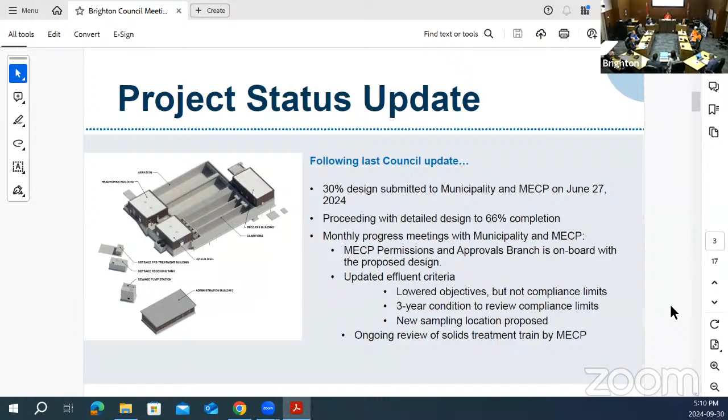So this slide shows you the overall site rendering. Again, this is as updated as last week. I'm going to kind of walk you through the different functions of the site so you're a bit more familiar with the different areas that we'll be talking about.

At the bottom left of the page, you'll see there's an administration building that's immediately north of the current facultative lagoon. And then in that same area, you see there is a septage pre-treatment building as well as septage receiving tanks. And then in between the building and the tanks is the sewage pumping station. So that's where all the sewage is going to get pumped from the Harbor Street pumping station as well as the gravity sewer.

So all the sewage will then get pumped into the headworks building, which is on the north side of the site there. In that building, there will be a screening process as well as grit channels on the outside of that building. Following that, the flow will go into the aeration tanks, followed by the clarifiers, which are the empty tanks that you see in the middle. Then the flow will proceed into the UV disinfection process, and from that point on, it will connect to the plant outfall that discharges into the wetland.

To the east of the clarifiers, you'll see there's a process building. That's where all the major equipment, for example, the blowers, the sludge pumps, and all the chemical systems will be housed.

Next slide, if you can. So the next thing we want to, can I go?

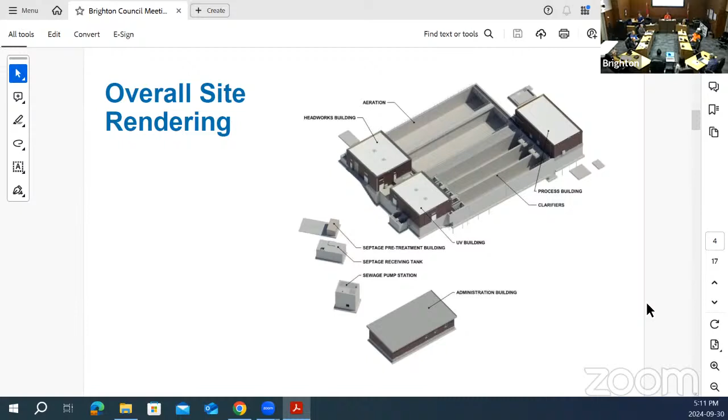So the next aspect that we wanted to review is the opinion of probable cost. As we move through this process, we wanted to bring council up to speed on where things have gone. Originally under the design concept from December of 2023, we were sitting at about 28.8 million. As you can see from the slide, having completed the 30% design and gone into more detail, costs have increased to 36.8. We wanted to give council an update on some of those main drivers that we're seeing in the industry and that are occurring through this project.

So I'm going to review these four main ones. We also have some slides that talk about the individual pieces, but the main drivers here, the big one being inflation and increased costs of equipment supply. We're seeing quite a large increase in a lot of equipment, upwards of 40 to 50% over the last eight months or so. I can't say to the driver necessarily of that. It's more of an economic thing.

The allocation of space for future expansion. Originally when we had done the concept, we were looking at just the design for the current treated capacity. We've now tried to make sure that we build in space for larger areas, and we're going to go through some of the future proofing that we've designed into the plant right now.

Some of the refinements of the scopes, for example, in consultation with Hydro, in order to provide enough power for the site, we have to buy a large transformer, whereas before we were under the assumption that Hydro would provide that. As you work through the design, these types of things happen. Also some of the indoor and outdoor installations, preferences and operational aspects as we work through with staff, as well as the administration functions. We've tried to refine that down, working with staff to dictate what areas and spaces they need.

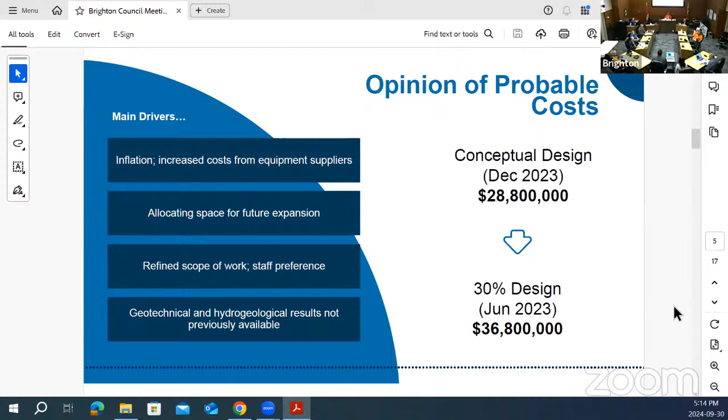If you want to go to the next slide, please. We've also broken this down by the individual component of the plant and tried to provide a cost comparison of where the costs have changed, and some drivers to the municipality of where things have gone and why. A lot of these I've already reviewed, but the influent pumping station has increased. A lot of these costs have increased.

For septage, originally we just had a tank. We have more pre-screening in there, things like that. Headworks, again, a bit of future proofing, as well as costs. For instance, the screens, since October, November, December, when we were looking at costing, have almost doubled in cost.

It's just one of those things that we continuously try and get updates on, but it's hard to put your finger on it a little bit sometimes. So I'm kind of working through these different ones. A lot of them, equipment costs have gone up. Future proofing, we're adding different pieces to try and facilitate an expansion in the future.

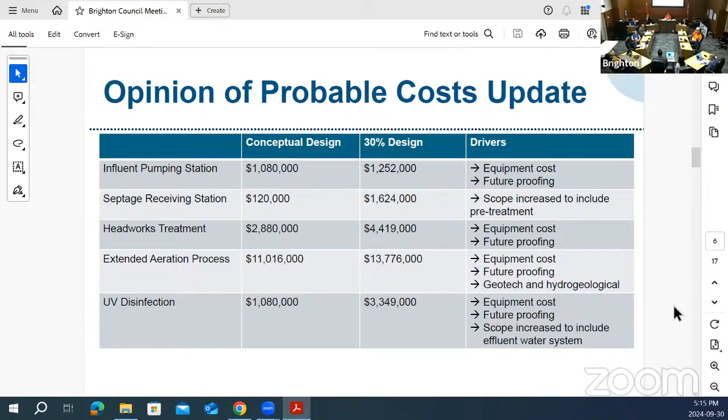Next slide, please. And again, kind of working through some of the different pieces. So the WAS stabilization and flow equalization, administration building, and then the electrical servicing and Arena Creek. So like we said, kind of coming in here and trying to show the difference between the 28.8 that we originally had and the 36.8.

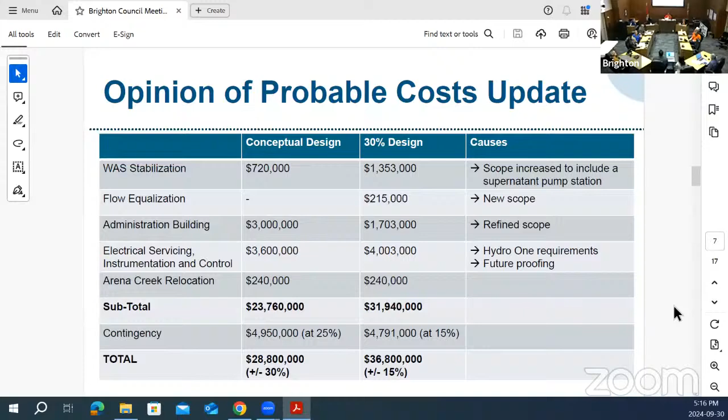Next slide, please. So the other aspect that we wanted to talk to council about, and understanding that budgets are hard things to balance, is trying to develop a plan here that we can provide the municipality with enough flexibility to try and mitigate these cost increases as they continue. So we're going to be putting in, and we're working towards this, 4 main provisional items that have significant cost implications. So each one of these is detailed here.

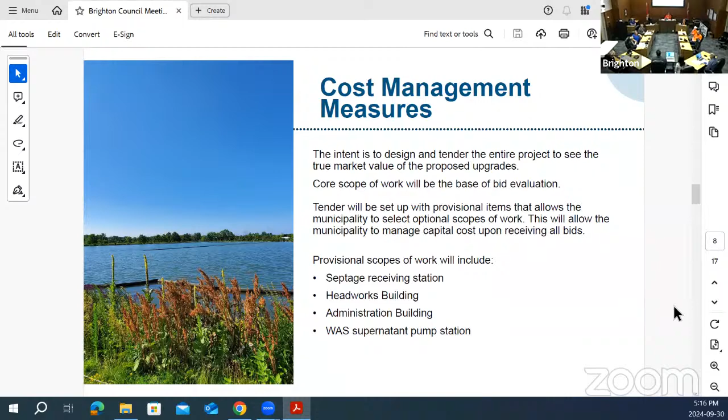And maybe if you want to go to the next slide. The way we've kind of divided this up is twofold. One is the core scope, which is basically the treatment plant and what we need in order to be able to provide treatment for sewage. The other ones are provisional items that aren't necessarily required. They do add value to what operations staff may do, or septage receiving, or other aspects, but could be cut out in order to facilitate a budget constraint.

So the core scope here, as you can see, is currently sitting at 28.9 million. And then the provisional items, so septage receiving at 1.7, the headworks at 4.5 million, the administration building at 1.8 million, and then the WAS supernatant pumping station could all be pulled out, at a cost of just under $1 million. So all totaling about 8.8 million in provisional items.

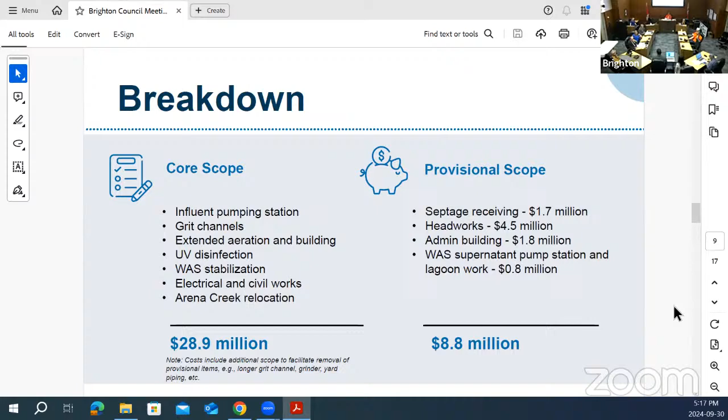So the intent is to put those to the industry, have them price that out, and then we'll have them put in costs for these, and then we'll be able to bring it back to council and make a decision at that point of what the budget and what scopes of work we want to proceed with. So Susan's going to talk a little bit about future proofing here.

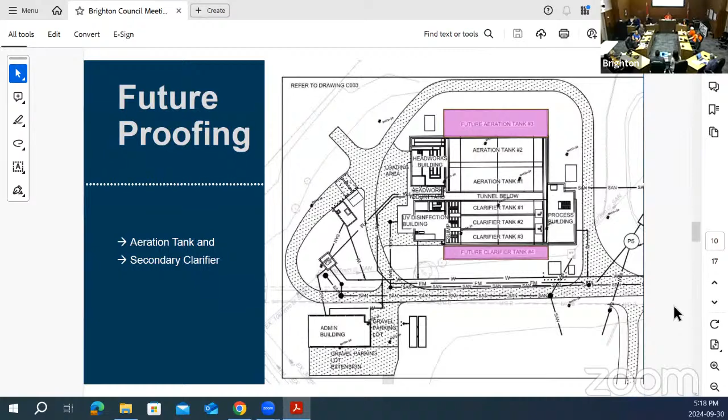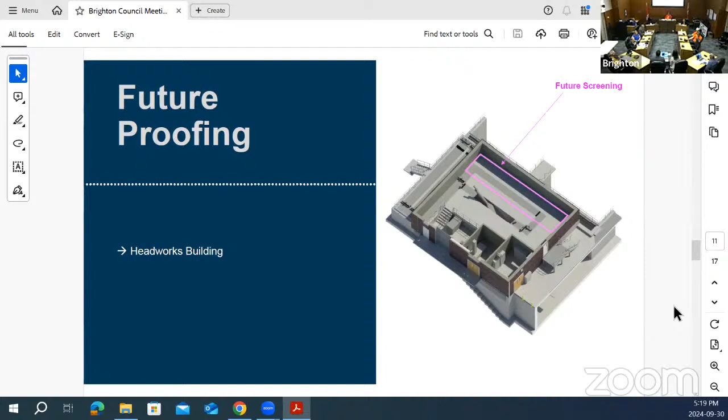And this is a rendering of the headworks building. So what we have decided to do here is to build a spare channel, which is where the shape is currently over. That's the spare channel for the future screening. So currently we have one screen that's sitting in the middle of that room there. That's an inclined auger screen. So that's going to be the active screen for this expansion. And then for the next planned expansion, the plan is to put an additional screen in that spare channel to get to the 6,000 cubic meters per day flow capacity. Next slide, please.

So this is the main process building where a lot of the major equipment is being housed. So the middle section is where the blowers will be sitting. And you can see there are 2 blowers sitting side by side in the middle of that room. So those are for the current capacity. And then there is a pad where the future blower is pointed at. That's the pad for the future blower to be able to supply the air for that additional aeration tank.

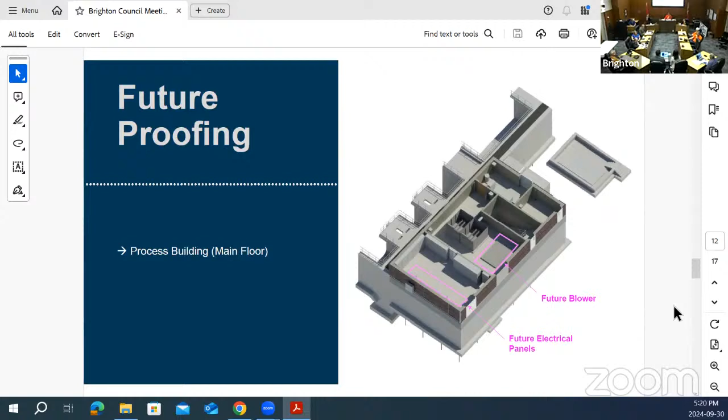And also there is an electrical room in the bottom corner of this page here. So that's the main electrical room that's going to house all the panels that power the rest of the plant, as well as the major equipment that's in this building. Again, there's wall space available so we're going to be able to accommodate any future loads to the plant.

So this is the basement of the process building where the sludge pumps will be housed. And then currently there are 4 sludge pumps sitting in that corner, and we have space allocated for a 5th future sludge pump.

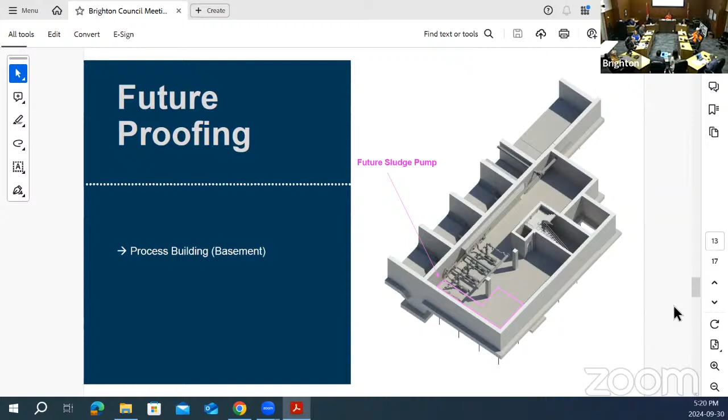So this is the UV disinfection building. Similar to the Headworks building, we have 1 active channel for the UV disinfection equipment. So those are the banks that sit in the channel, submerged, and we have allocated space for a spare channel on the bottom side of that room for future additions, as well as a future effluent weir. That's a hydraulic device that controls the level within the UV channels as well as the flow measurements. So that's all accounted for in terms of that backup channel for the future.

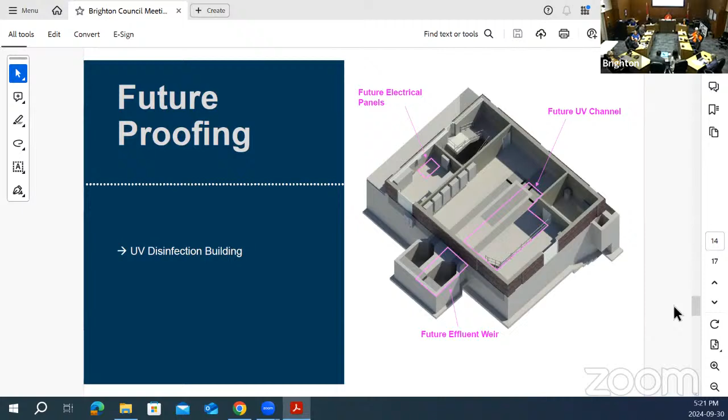Okay, so in terms of the schedule updates, we submitted the 30% design back in June, and we're well underway for the 60% design submission by end of October. We will be submitting the building permit application by end of this year, with the ECA, that's the Environmental Compliance Approval application, with the ministry in January 2025. Then we'll proceed with submitting 100% design by February, and be in a position to tender this project in February and close the tender by end of March. Construction start will be in the spring of next year. And that's the end of the presentation.

Thank you both. Before I go on to questions of clarification, because Councillor Butwell wasn't here when the CAO made her remarks, I'll note that this is just a presentation for information. Staff will be bringing a report on the 15th of October with a recommendation or recommendations for us to consider. Just an FYI for you. Councillor Wielden.

Thank you, Mayor, and through you. Love all of the future proofing. My whole approach is what can we build today that we don't have to build tomorrow? So I love that. Based just on my layperson's look at the number of tanks in this scenario, it looks like we're going to be able to add 1 more on either side. At what point would we need to add that capacity based on our growth pattern? And how far into the future does this future proofing take us?